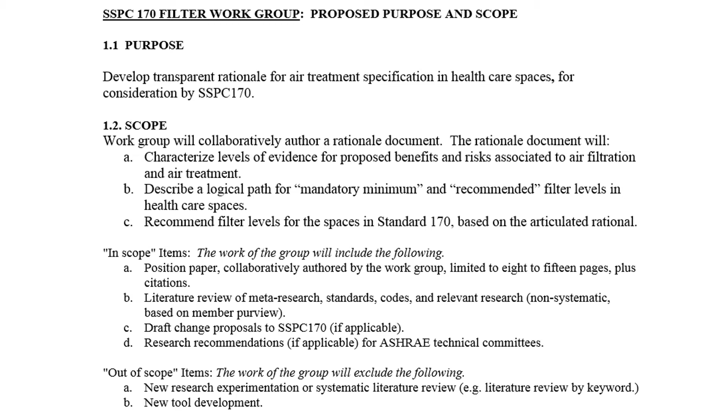And just to put the bottom line up front, these are the recommendations that we have at this progress point. First, to assign filter efficiencies based on this mass balance model. I'm going to show that model in a little bit here, and a picture is worth 1,000 words there. Two is to create performance pathways. We want to set up the standard for alternative approaches and incoming technology, essentially.

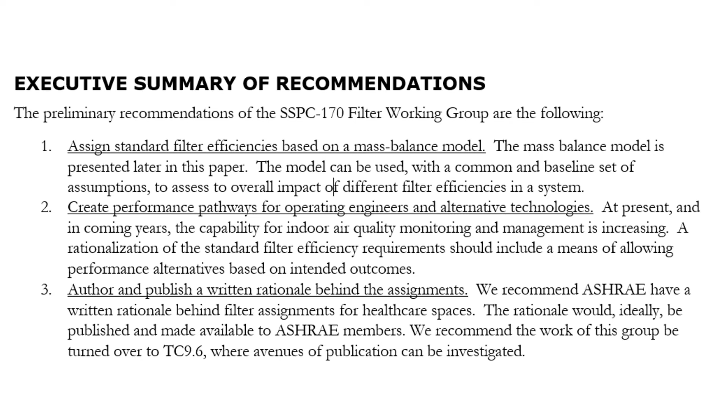And then finally, we really recommend that ASHRAE have a written rationale behind the filter assignments. We want to publish it, make it available to the members. We're recommending the work of this group be turned over to TC 9.6. Mike Matire has kind of volunteered to look for a vehicle for us to publish that. What's really happened is ASHRAE 170 is a mandatory minimum document, and you'll see that a lot of what we're uncovering really belongs in design guides and recommendations.

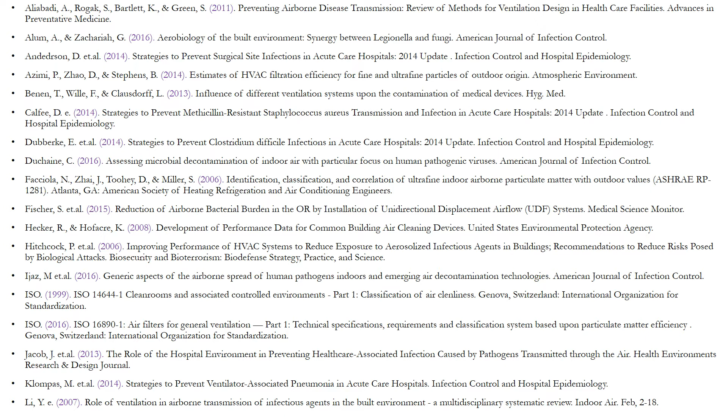So part of our scope was to review evidence, and we didn't do what I would call a scientific or comprehensive literature review. We didn't go into the databases and search for air filters and then read every paper. So the list of studies that we have are just the studies that we talked about or the ones that our members sent in. And there's 2 slides of this.

We did share our list with Roger's team back in January, so they have all of this. And we've also reached out to Roger and Ferd for a few sidebars. We didn't want to miss any big stuff that that work group is finding, or vice versa, really.

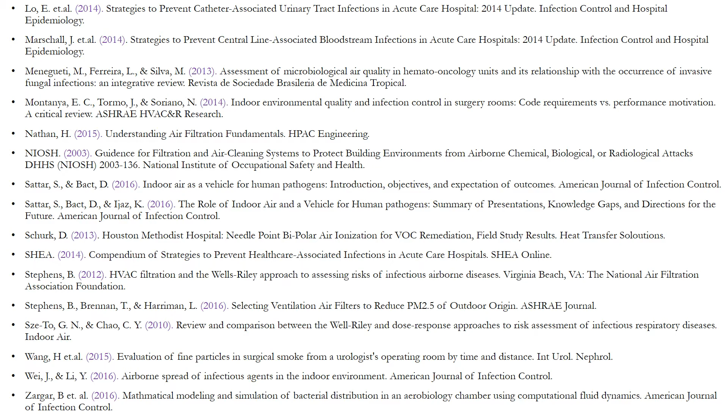So we started our work with this survey, and hopefully some of you participated in this. We asked this big, honking sort of meaning of life question: why do we need filters in healthcare spaces? And this was all free text response. We had 52 responses to this survey. And that really told us what people were thinking about and what the important topics were.

And no surprise, the biggest topic was infection control and the usual suspects of critical spaces. So we tried to hit infection control pretty head on. Dan Kay was able to get an infection preventionist to attend our meeting number 2. We had a really lively discussion with him. Another one of our members has been able to present a slide deck that we had from about 2 meetings ago to a room of infection preventionists, and that went pretty well as well.

So I would love to say that what we've come up with is a bulletproof rationale based on clinical evidence, but the bad news is if you want to find clinical evidence for filters before the coil or after the coil, or like a MERV 10 versus MERV 13, you're not really going to find it. So much of what we would need for evidence-based decision making simply isn't there. So one of the things we've come up with is what I call the summary of the unknowns. And I'm going to go through that real fast.

First off, there is no acceptable level of indoor particle count or particle matter. The EPA publishes PM for outdoor air, and most IAQ people sort of take that outdoor air number and bring it indoors. What we'd really like to see are separate numbers for healthy people versus people recovering from surgery, or sick people, or cancer patients, or that type of stuff. We don't have any of that.

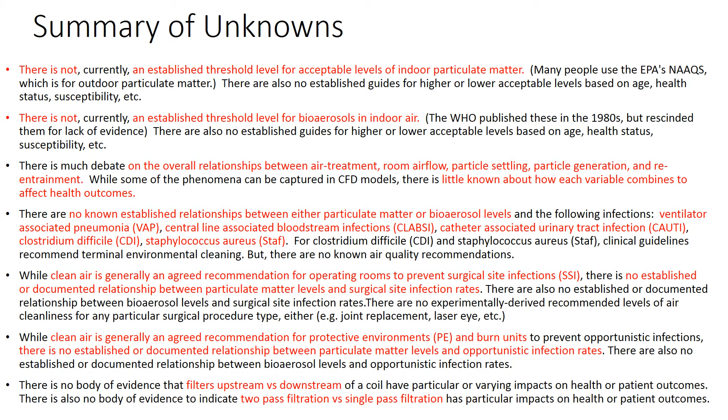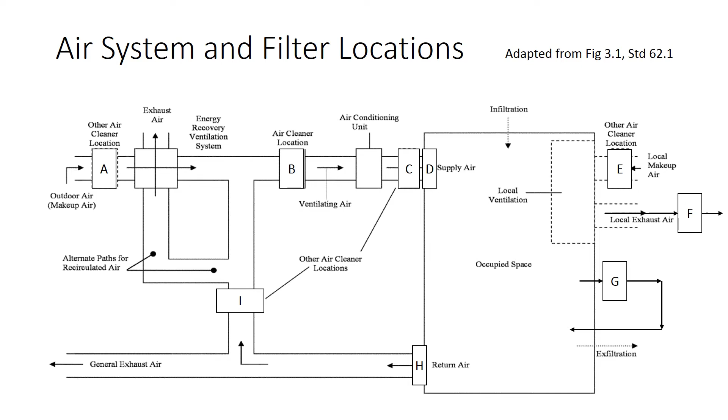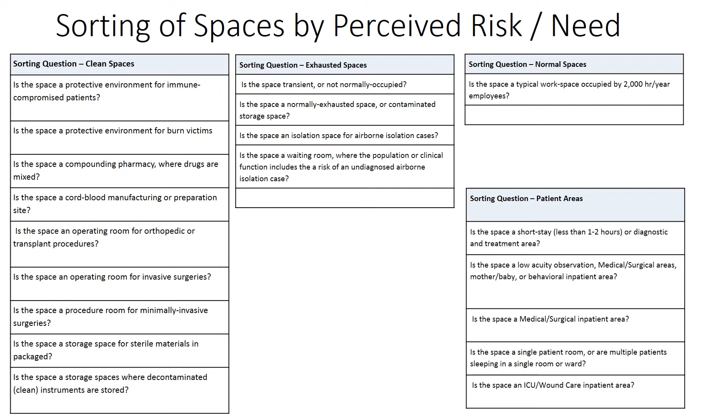This is one area we want to get feedback on. We could spend more time on this list. Well, I think among our group, we want to spend more time on these lists. But I think we also want to hear some perspectives on sorting spaces for assessment, largely kind of in the absence of a lot of evidence.

Okay, so that brings me to the mass balance model. We wanted to do some math, and so we wanted to have some sort of calculation to look at different configurations. So we built this model where we could look at the effects of different filter configurations and efficiencies. What we did was use a mass balance equation. You can find this equation in Standard 62, but really it's just a conservation of mass equation.

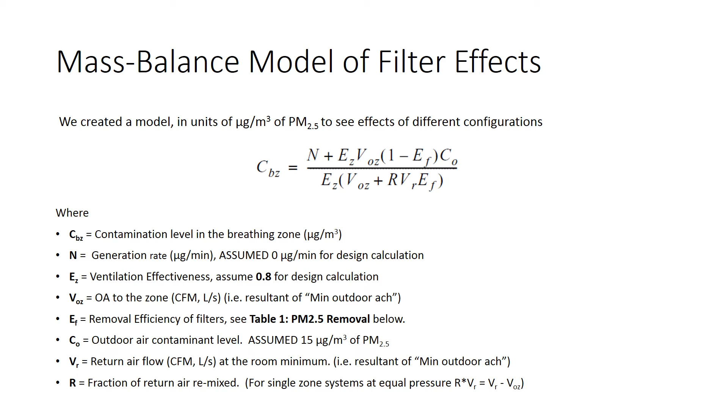The model is in units of annual average PM 2.5 because we have data on annual average PM 2.5 from weather stations. And then the rest of the variables in there are CFMs of supply and return and outdoor air and filter removal. The filter removal numbers that we used for PM 2.5 come from this table. This was an EPA study, which was featured in the ASHRAE journal rather recently.

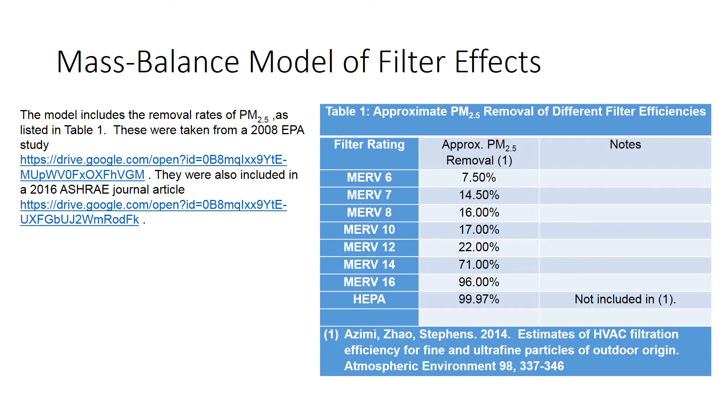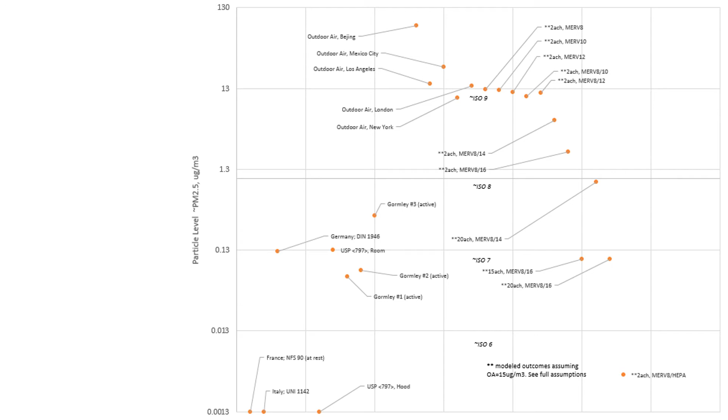And so what we would do is put a proposal out there and get a vote from everyone on the call. And then for anyone whose vote was a 3 or less, we would talk through their concerns. I'm going to read through these kind of quickly. There are 9 slides of these. So the first one, in spaces where the primary ventilation concern is exhaust, then supply air filtration doesn't need to be specified per se. You could use transfer air or even natural ventilation for supply. The vote on this was a 4.1.

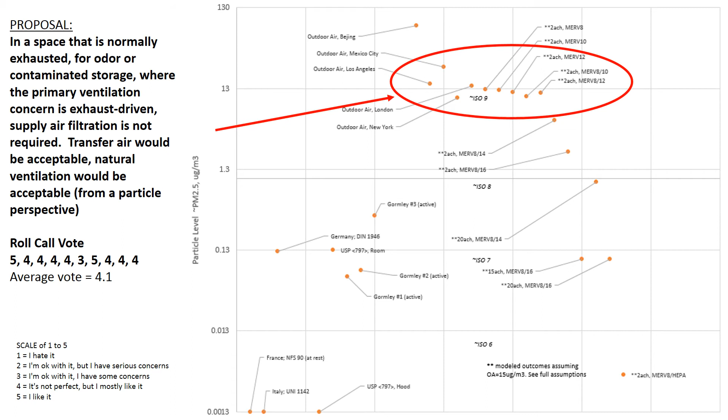Next, any human-occupied space should meet the indoor air quality requirements of Standard 62. That would include filters on supply air. This vote was a 4.8. Now, I will point out that Standard 62 allows natural ventilation and that the filters in Standard 62 depend on outdoor air quality and that there's a whole bunch of equipment requirements that go along with Standard 62, and all those would carry over.

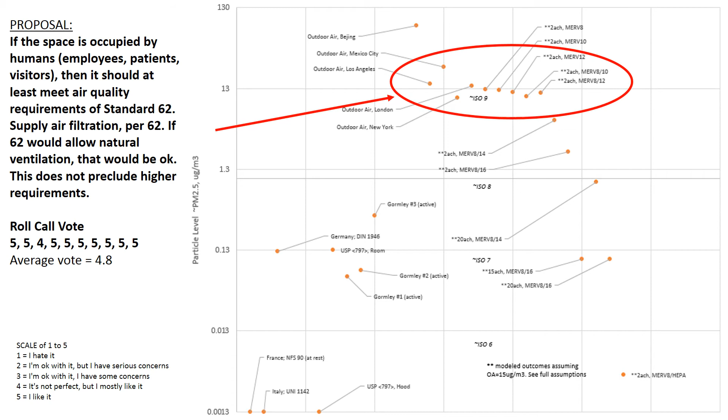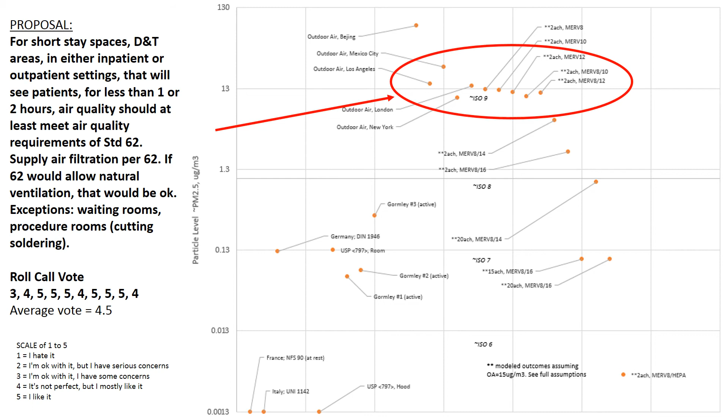Next, any patient space, inpatient or outpatient, where patients are staying for less than 2 hours, excluding waiting rooms and procedure rooms, can also use the Standard 62 rules. No additional filters are needed. That vote was a 4.5. Next, for out and inpatient spaces, up to and including a med surg, but not an ICU, we said they could use Standard 62 rules. No additional filters needed. That vote was a 3.2, which is not super strong.

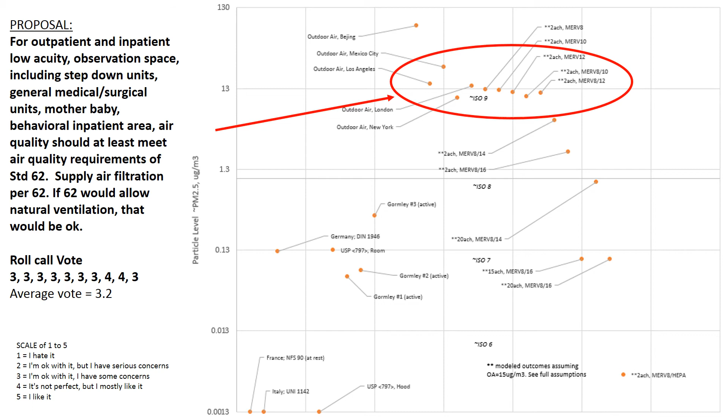So next, for out and inpatient spaces, up to and including med surg, but not an ICU, you could use the Standard 62 rules with the added caveat that you have to have a MERV 14 somewhere in the system. Not a pre-filter, final filter per se, just a MERV 14 somewhere in there. That would still not exclude natural ventilation. That vote was a 4.7.

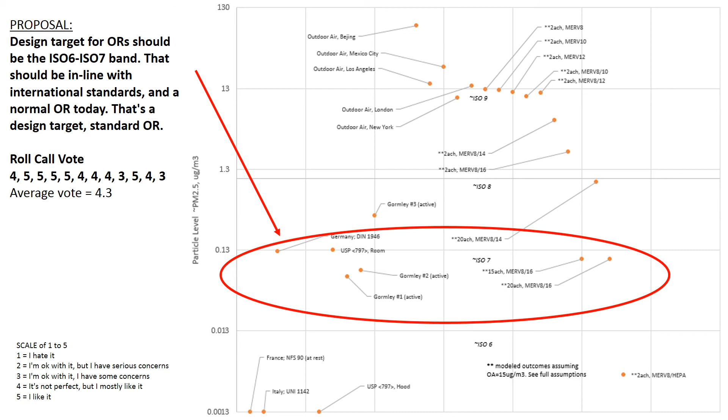The next, for operating rooms, the design target would be somewhere in the 0.013 to 0.13 microgram a cubic meter, ISO 6 to ISO 7 range. That vote was a 4.3, and that should correspond to a normal operating room today. Next, for an OR that is for orthopedic or cleaner procedures, the design target should be an order of magnitude less, from 0.0013 to 0.013 microgram a cubic meter, or ISO 5 to ISO 6. That vote was a 4.3, which is pretty strong.

California has this, so does France, Japan, the UK, but it's never been in 170. And the low vote concerns, by the way, had mostly to do with logistics, designating a room that's cleaner. And of course, bears repeating, I guess, that there's no evidence here, right?

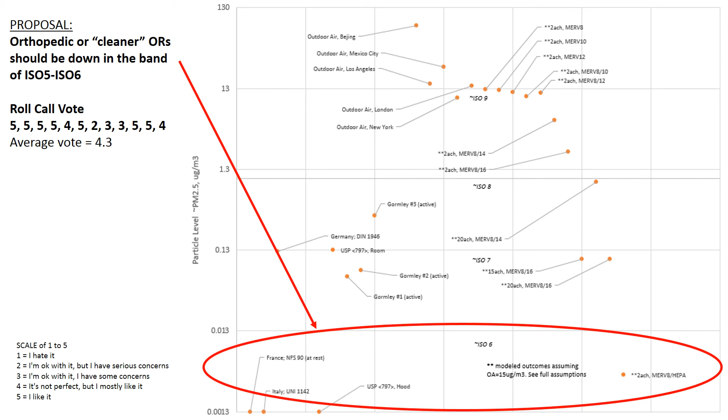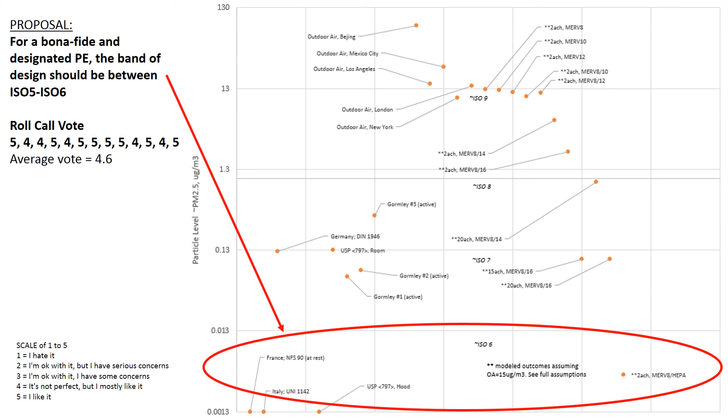For protective environments. And I have to say, in order to even get this to a vote, we had to specify that these are designated, bona fide protective environment spaces where all the protocols of a protective environment space are at play. And we started by saying that the target would be in the ISO 5, ISO 6 neighborhood. That vote was 4.6. But then we actually realized that 2 air changes with a HEPA filter would be less than that.

And so we have a proposal for a bona fide protective environment. The design target would be in the ISO 5 range and would in fact be intended to meet the 1 CFU per meter cubed clinical recommendation. This vote was a 3.8, and this, by the way, would line up with some of the international standards. And that's the last one. Those are all the spaces that we worked through in terms of this roll call voting.

And since this is a progress report, we're going to ask for feedback and some advice on next actions. Obviously, one thing we could do is keep going with this type of proposal and voting process to cover the rest of the spaces that we showed earlier.

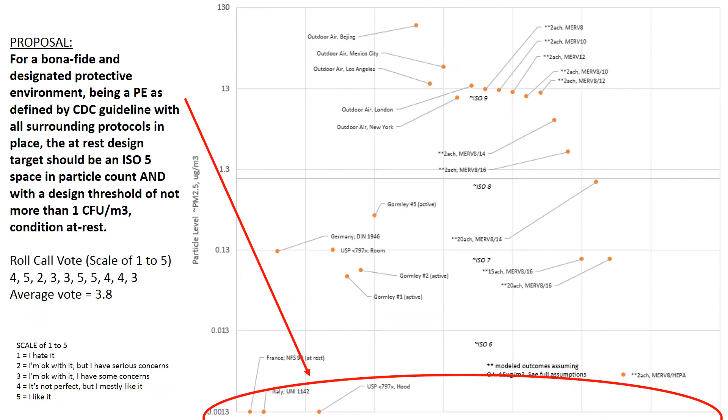So we're thinking that the mass balance model and its logic would guide the prescriptive filter sets. Like today, you wouldn't need to show a particle count in an operating room, but we're definitely thinking about performance measurement. If you chose to go the route of measurement and validation, those paths should exist in the standard. We kind of talked about this as a future readiness thing.

IAQ testing and monitoring is not going to be economically feasible in all parts of a hospital right now, but certainly compared to 10 years ago when the least expensive particle counter on the market was 30 grand, there's a big shift. And that is going to continue. Price points are falling, alternate technologies are coming out. And so whether we like it or not, CMS and some of the AHJs tend to lock in on 170 as an operating standard. So if the performance criteria isn't there, then it isn't easy for them to recognize.

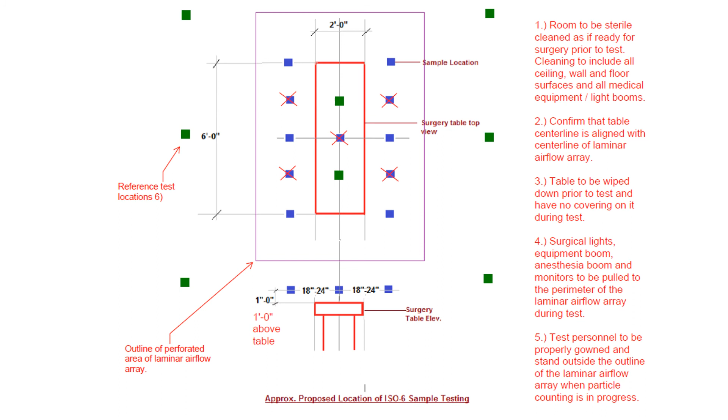So we had a good discussion about what to measure, when to measure, how to measure. We talked about ISO class testing for clean rooms, like protective environments or pharmacies. Pharmacies were already doing them, or operating rooms, obviously operating rooms. And I should say that clean spaces are where performance is most commonly measured in the international standards. A lot of the international standards have it, but as I said in the beginning, they don't match. None of them match. And so we would need to establish that based on our own rationale.

ISO standards are not appropriate for what I'll call the more normally clean spaces. PM 2.5 is a much more likely metric there. And we talked about where that measurement might be. We don't actually have a recommendation on that yet. There is, by the way, an ASHRAE standard for filter challenge testing, and that could be useful in commissioning. And we also did talk about natural ventilation, which could be enabled or disabled based on a particle metric.

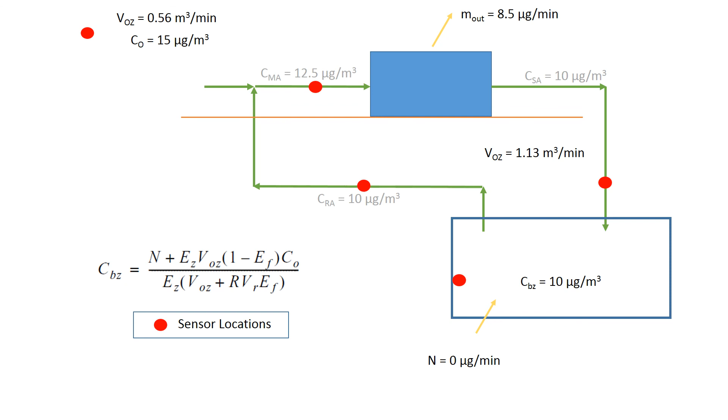On the calls, both the owners and the design engineers agreed, by the way, that it isn't very likely that we're going to design or build our systems differently right now or even in the next 5 years. We'll probably keep using a set of standard prescriptions. But the whole idea here is that during commissioning or operations, we see the opportunity for performance alternatives to come into play. And that can become kind of a self-fulfilling prophecy. As the market learns and people start to implement that stuff, then the standard can grow smarter as it goes.

Our final recommendation is to document a rationale and make it available to engineers. As I said, Mike Mattire and TC 9.6 have essentially volunteered to look for a vehicle for publishing it. The way we've been running this filter work group kind of puts us in a good position to produce some documentation. Our meetings start with 10 minutes of technical topic, and then we have open discussion for the rest of the hour, and all the meetings are recorded and then transcribed. Not word for word, but point for point. So those meeting minute files, we have about 15,000 words. It's a pretty darn good record of the discussions, and it should put us in a pretty good position to write what's necessary.

Whatever 170 decides, there will be public scrutiny. Some people are going to say the filter levels are too high. Some will say they're too low. That's likely unavoidable. But we certainly can anticipate those questions because we're having those discussions. So we should be able to hand the committee a list of frequently asked questions and proposed answers that you can simply cut and paste during a review period.

And with that, I'd like to open it up for feedback and questions.